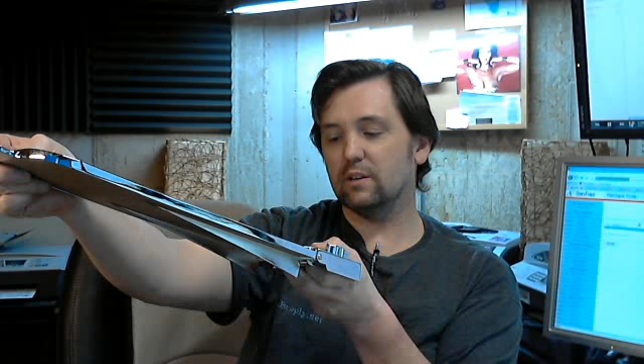But when you're doing this, you can feel that the spring strikes me as a strong spring, is what I'm trying to say. I've weighted the shelf at the outside position, and it really only takes about 1.25 pounds to keep the shelf down.

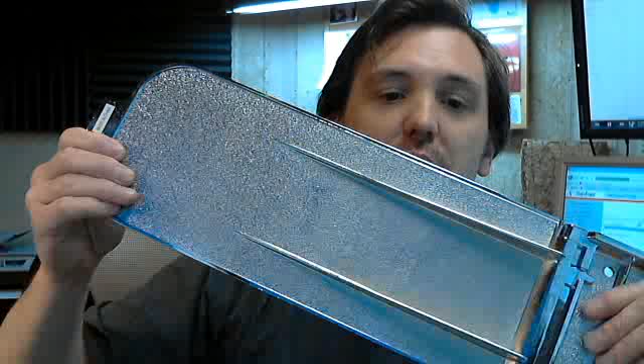So let's give you a little closer look at the shelf. I think my camera's got a little bit of lag on it. They call this finish stippled. This is the portion that mounts to the toilet partition. That's the side that you see.

So this is what it looks like when you're looking at the shelf from the toilet compartment. And the shelf folds down and then returns back up. So it'd be a handy shelf to have when you're in the toilet compartment in the seated position.

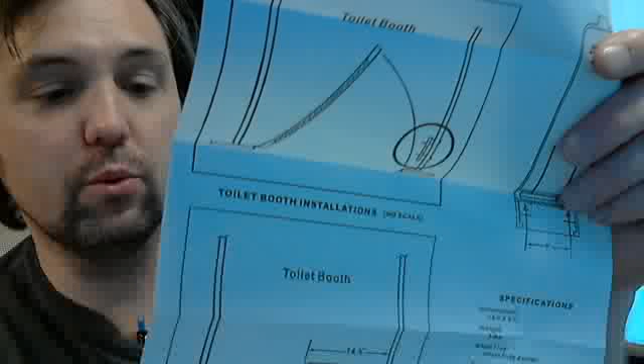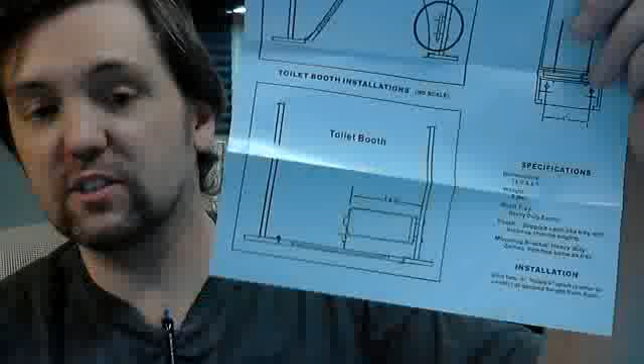Do click on the link to the instructions above this video, because they will very clearly show you how this is installed. Basically, the instructions say to install the shelf in the path of travel of the toilet compartment door. What they're meaning is that when the toilet compartment door is in the closed position, as you see here, the shelf can come down and would actually help prevent the door from being opened, I suppose, although that's not its intended use, but that would be a net effect of it.

Installing it that way includes 2 heavy-duty, so it's got to be 1/4-inch bolts. Let's take a look and see. Not really saying what size these bolts are. I'm going to guess that they're 1/4-inch.

You'll have an acorn nut on the exterior, or on the opposite side. When you have the assembly like this, there's an acorn nut that has a hole drilled through it. That'll be on the inside. Installing it, you'll install this 1/4-inch flat washer, then your acorn nut. You'll then remove this other acorn nut that's got the hole through it.

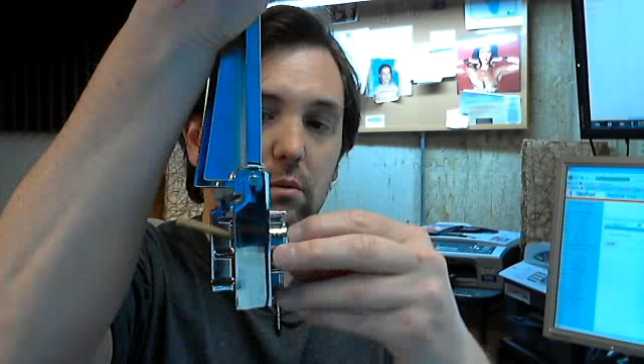Mounts through the wall, through the compartment. Won't be quite that far because your compartment will sit right in here. Then on this side, you'll have a 1/4-inch lock washer. This bolt is long enough where you'll be able to install it. It won't stick out. The bolts will not stick out past this support wing when they're installed, or most likely will not. So if your compartment is 3/4 thick, which would be pretty typical, you can't even see it. Maybe it'll stick out ever so slightly, but most likely will not.

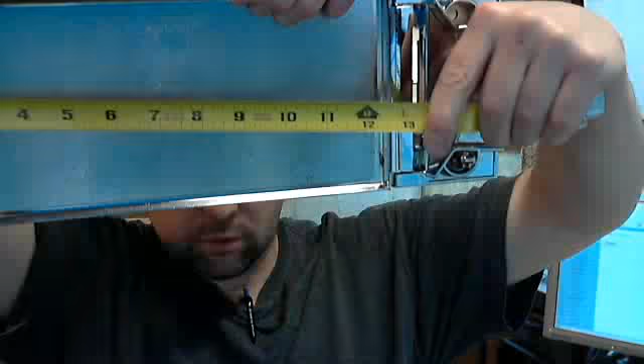Let's get some dimensions on this. So first of all, the length of the shelf itself, about 12 inch, well, closer to 13. Let me measure that by hand. You got 13 inch on the inside of the shelf. The usable portion from here to here is 13 inch. The usable width of the shelf is 5 inch.

You can see there, chrome plated. It's an imported item, but feels like it would do a decent job as a flip handle here to allow it to be easily pulled down.

Don't really have too much else to say about this except that it's a typical shelf, a fold-up style, used in a lot of commercial applications, hotels. Not hotels as much as I've seen them in airports. Although I have seen them in hotels as well.